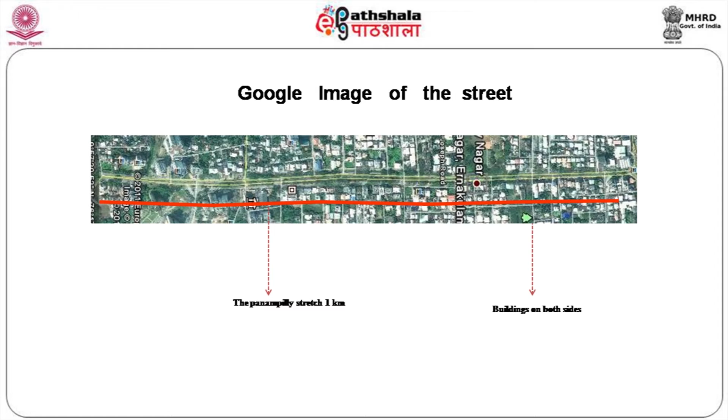This particular area we are going to talk about is Panampilly Nagar, located in the city of Cochin in Kerala, where the entire stretch is approximately 2 kilometers. This is one of the very famous streets in Cochin city, a very prestigious residential location, and this particular road is more favored for offices and business houses. It has become a lot more commercial and the land value has been hiked up in recent years. Every bit of land is put to its best use, evolving into one of the main spines and points of interest for Cochin city.

There are ranges of activities happening in the street. Since the street is burgeoning, it comprises wide varieties of activities happening day and night. During the day, the stretch is quite inactive, slackening without much activity because all the people go to the office. It's in commercial office spaces, so people work inside the office, not coming out.

During the night, the street is brimming with life, vivacious and wide range of activity from recreation, eat outs and performance can happen. So how do you react for the street?

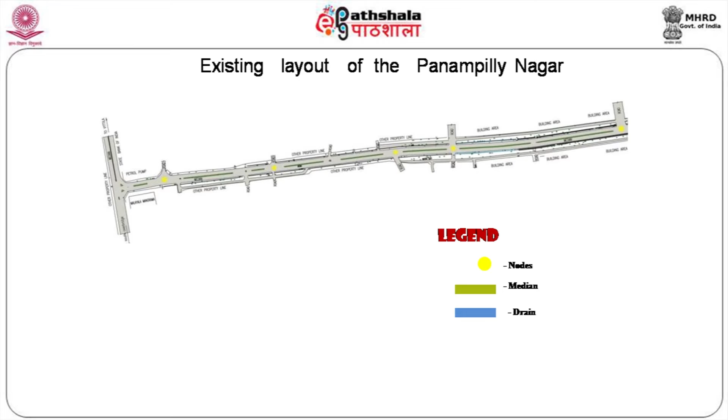But how do you react and how do you design to make it one of the best streets in India? That is where we stand.

The street lacks footpath. There is no footpath, mud is available. Pedestrian pathway needs to be created and define spaces for the shops. Shops are located randomly, and these shops also become the life of the street. You cannot say that the shop should not be there, throw it away.

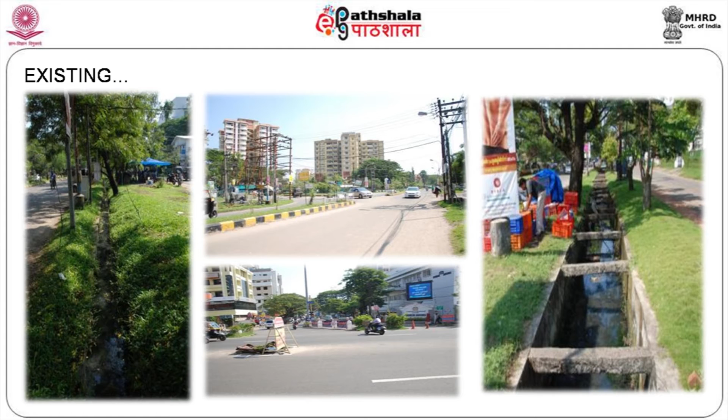Most of our milk vending is happening on the streets, so we have to provide them a proper place so that their activity goes up in the early morning or afternoon when the milk van comes and delivers - they distribute the milk to different places. So these are all the activities which need to be taken care of for our purpose.

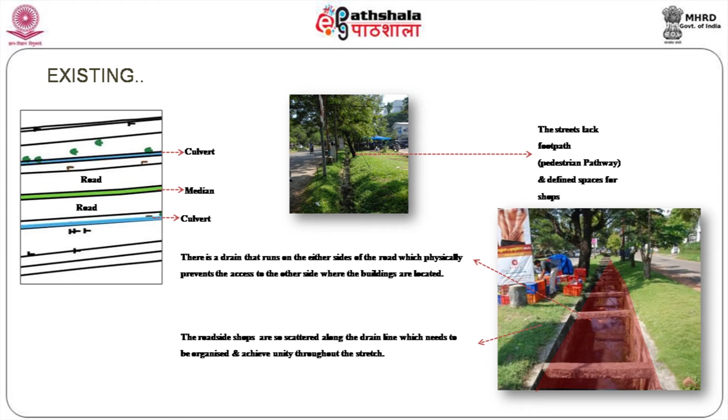Then you have pottery selling of mud pots for the plants. You have urlis to sell. All these things are happening.

The existing roundabout has to be redesigned with a uniform character. There, you don't have a proper planting plan - there is no color or anything there. All are haphazard - whatever people say in the moment, they design and put it, that's all, then they forget about it.

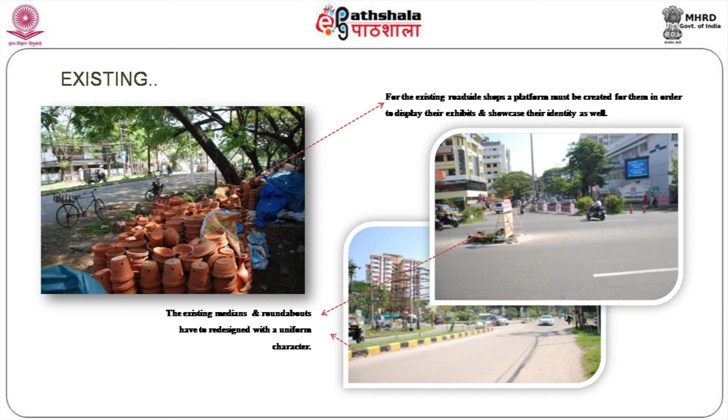Now, as an approach towards urban design, what needs to be done is more important in this context. So, designing features of Panampilly - what design needs to be done?

Tree courts - you have to create trees in proper spacing. Normally trees need to be planted at 6 meters, 5 meters, depending on the size of the tree. Paving material is also very important in streetscaping.

Median bollards so that people don't just cross the road so accidents don't happen. Shops, seating, galleries so that people can sit in the evening and watch people walking around, and old people can sit in the galleries and chat. A small stage can be created, some performance can take place, node points, and some mounds and undulating lawn can be created. These are the main features of the roadscaping.

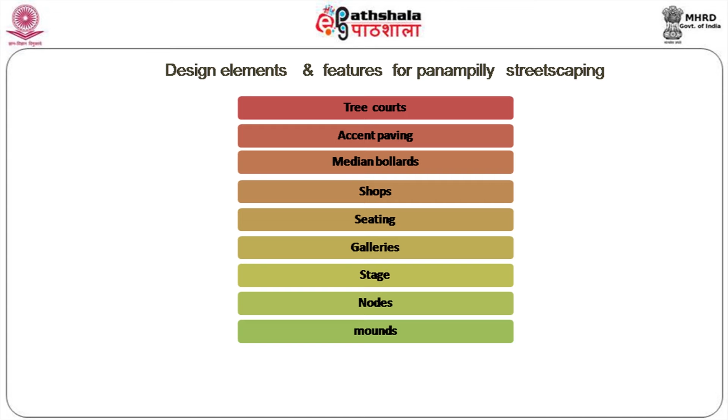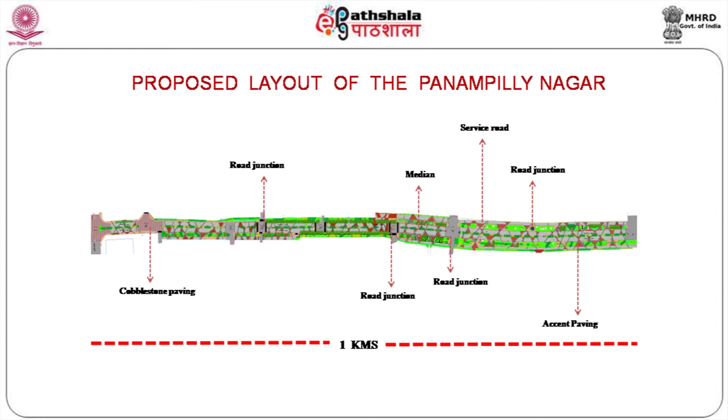Proposed layout - this is a layout plan where you find a lot of red color triangles and scissor crossings, road junctions are there, all are there. But how do you - this is when, if I show you the next plan, you will understand.

A different paving pattern itself is evolved on the road. You have black topping, in between you create some scissor crossing like beams running, light beams running around, so that the central median is with nice royal palms, good greenery, and traffic is controlled by this means. When there is a junction coming up, you change the paving pattern so the driver - the main important thing is the driver, how he drives.

When the road pattern changes, he knows there is some change. So how to react for the change? That is what is more important.

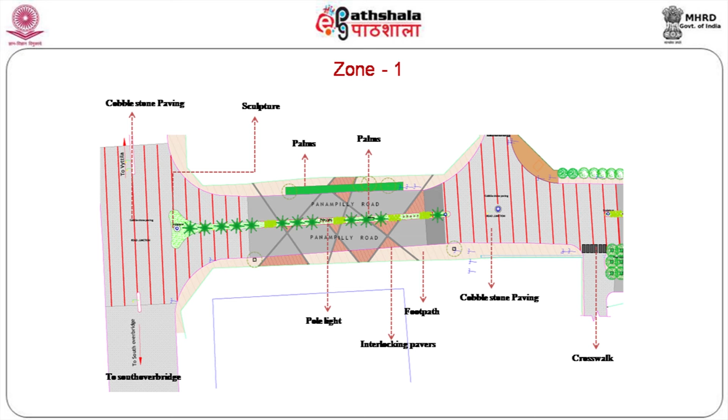See, what pole light is given, flamed granite is given in between the road, accent paving is given, trees are planted along the border, palm trees are there in the median, footpaths are provided. When there is an open space available, in order to show the road much bigger, we have meadows, lawns are there. Cobblestone paving in between acts as a footpath crossing. All these things are there with good lighting - all these things have been taken care of.

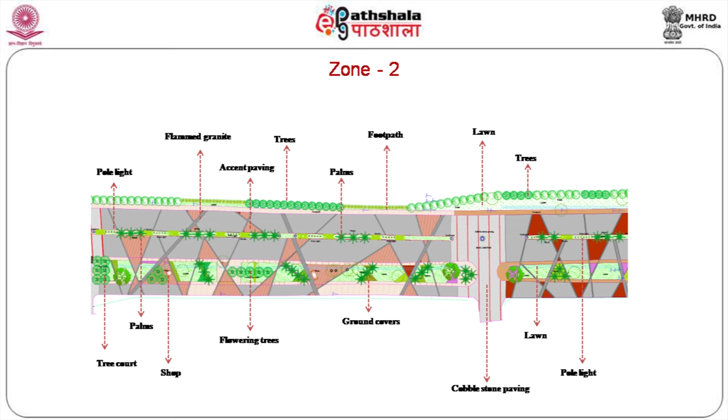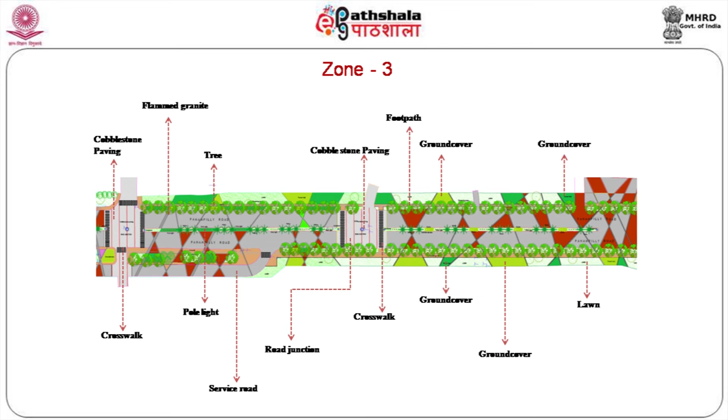This is again zone 1, 2, 3. We have divided the zone so that when you read the drawing, you'll understand what is really happening. Space provided for the crosswalk, space provided for the pedestrian crosswalk. Basically, nowadays we are doing a tabletop walkway so that you need not step down or climb up in order to have a walkway.

Junctions are identified properly. Sculpture courts are created so that you have a lot of sculptures and other things, so that the road will have a lot of vibration apart from just tree planting. A lot of vibration in terms of different types of plants, different types of planting, and different types of urban scaping.

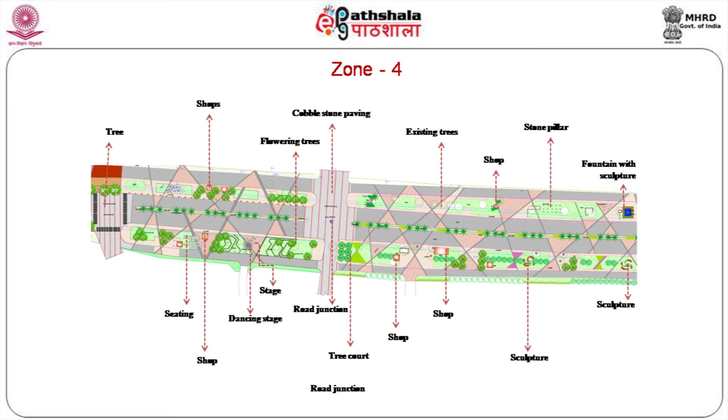For example, an amphitheater, pergolas are created, some rain shelters are created, seatings are provided. So a lot of activity and a lot of things can happen, with the service road also available on this road, being one of the major roads in Cochin. You have ample scope for developing this particular road.

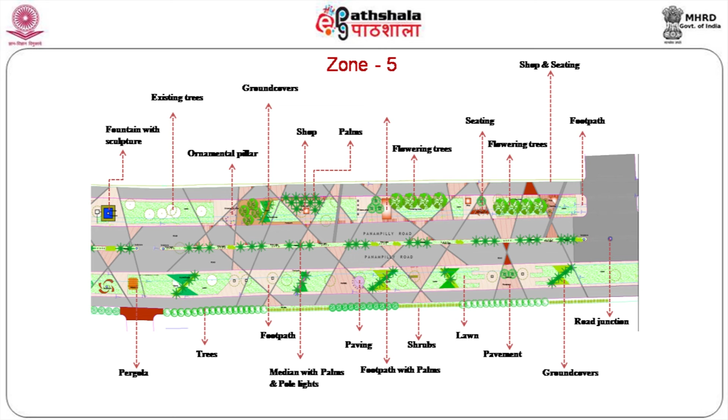You go to Cairns in Australia, where people really think in terms of central greenery, large greenery, with a footpath in the center. Traffic will go on both sides of the road. So you have a large greenery in the center. So there are different outlooks to different landscaping. Of course, other foreign countries don't have a population like India, so we have to restrict ourselves to the present situation. But these roads can have no vehicular traffic during the night time. These are all the control measures we have to bring in.

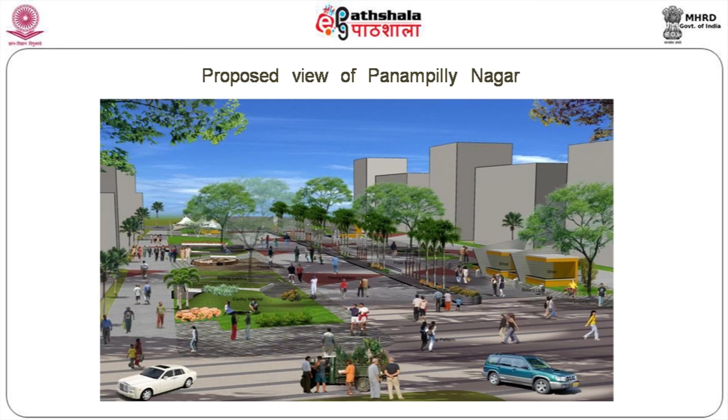So you can see the changes in the flooring. You have a blacktop, you have a cobblestone, you have a different granite stone, bollards are there, tree pits are there with seating arrangement, different types of shops are available, children and different age groups can enjoy the space like anything. We also have to think in terms of going a step further to provide the facilities for the people so that people will definitely use them.

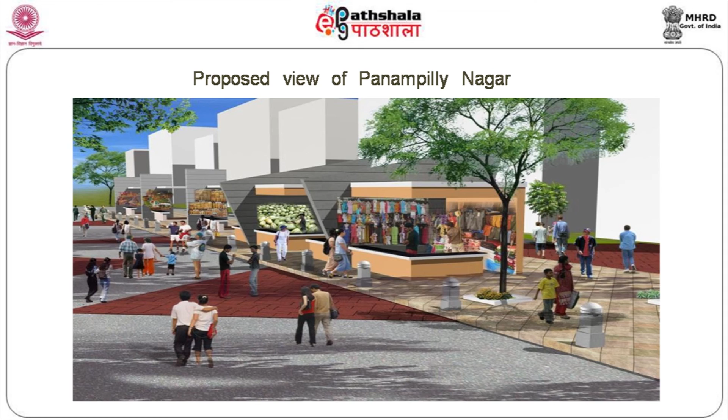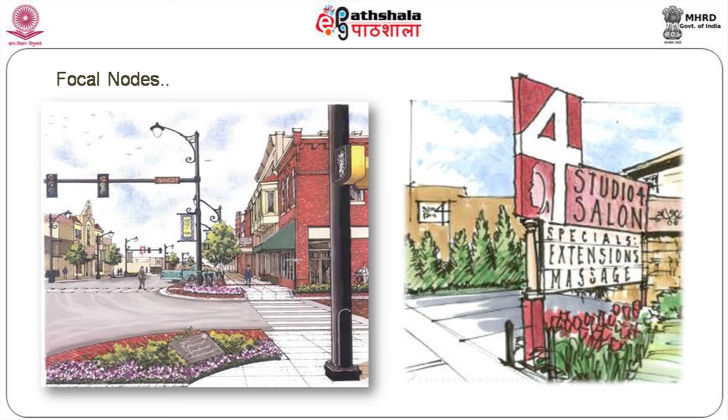These are some of the heritage signages, which are very important in the roadscaping. These are some of the focal nodes that need to be provided. And lighting during festivals like Onam or Christmas or New Year, Vishu. A lot of shopping activities are possible in this area. You have to create the spaces for them.

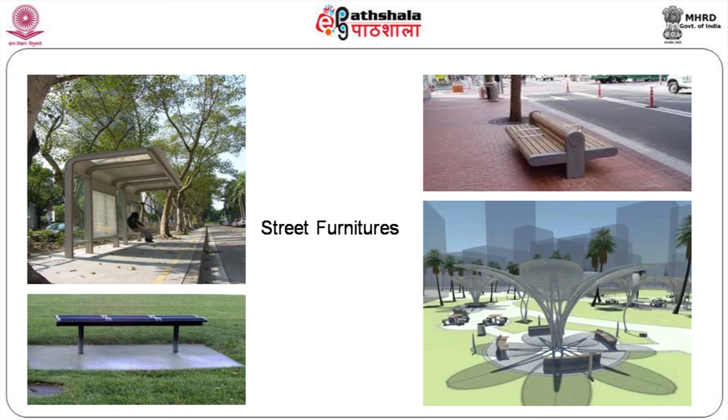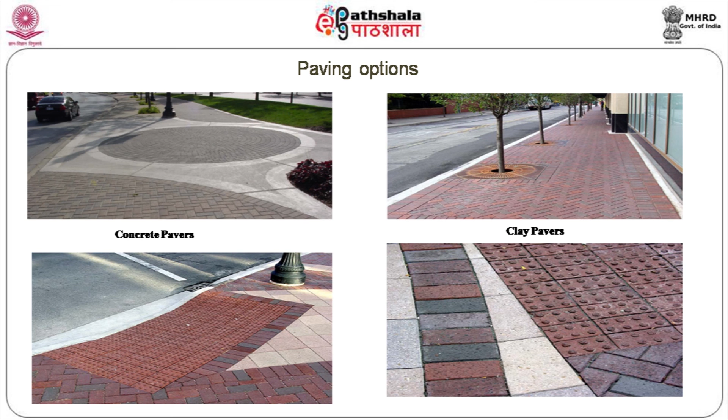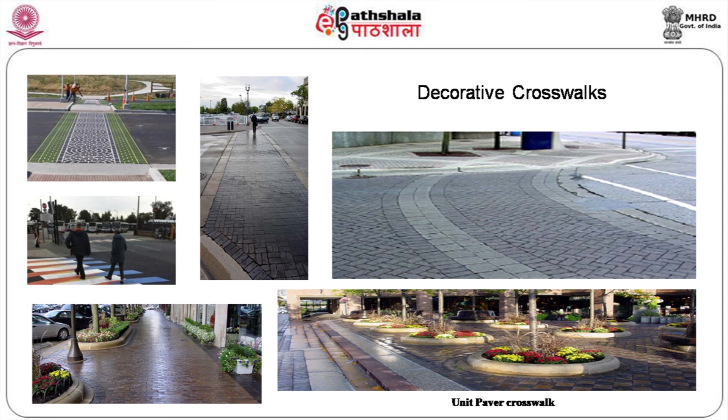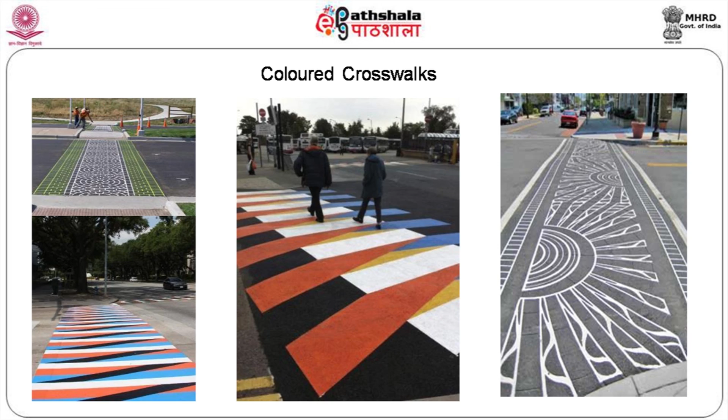Like litter bins, what kind of litter bins do you want? Why do you need them? Because we don't want any dirt or waste spaces. You have to segregate between solid waste and compostable waste. These are ideas for the road crossing. Again, ideas for the street bollards. Ideas for advertisement, and then small display stalls, road signages.

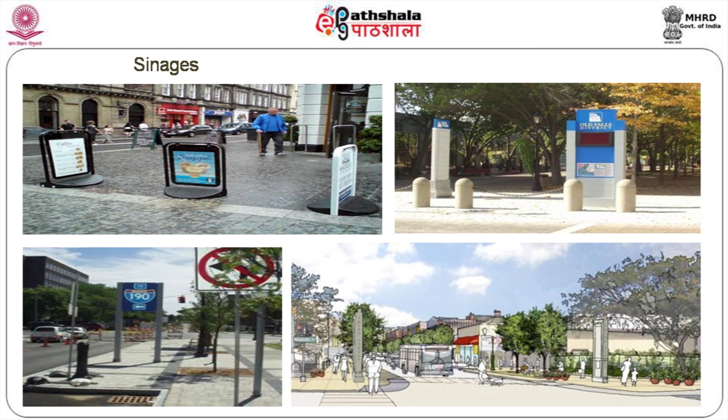That's all. So once this road comes up with the design inputs we had given, this will become one of the most apt urban roads in India, because the road is used in different time periods and in different ways. Morning till evening it will be used as a commercial road with a lot of traffic moving around. After 7 in the evening, people will be using it more as a pedestrian walkway with a lot of shops, lighting, and seating space available for them, and greenery around you with a good lighting facility.

All these things will happen only up to 11 p.m. People will set up their shops by 7, close and clean up everything and go by 11. So you have a totally different activity. As I told earlier, it's going to be a fun and food street. You will have a lot of fun for the people, and different varieties of food available here. So enjoy this road. Thank you.